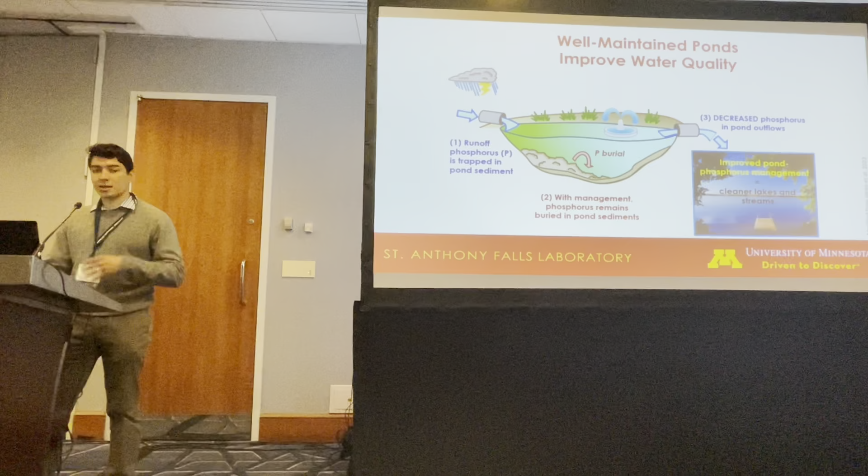So they're constructed as this kind of, I should paraphrase, they're not all constructed. Some of them are natural ponds and wetlands that have been converted into a receptacle for urban stormwater. Some of them have been constructed for that sole purpose. But basically they're designed to be sacrificial to some extent and capture all of these nutrients and pollutants in order to keep the lakes clean.

Now, they come in all different shapes, sizes, and colors, and how you manage them kind of depends on your priorities. Sometimes you have a pond that's treated as an amenity, it's in a very public place. We have to make sure that the water quality there also is kept to a certain threshold of quality. In other places, it's out of sight, out of mind, and you just let it go as long as downstream is protected.

But when we take a closer look at some of these ponds, and the green ones in particular, we see that there is quite a bit of phosphorus and nitrogen going on in that water. And if you know about how they're meant to be protecting against phosphorus in particular, we want phosphorus to settle to the bottom and stay put. So if there's a lot of phosphorus in the water column that's feeding the duckweed like Ben was talking about, that's when we start to get worried. We want to take a look and make sure, okay, does that just stay in the sediment in the pond, or does it get into the water and then flush downstream?

Unfortunately, green infrastructure, stormwater ponds, it's all connected to this big, larger urban watershed. Sometimes stormwater ponds drain 100 times their surface area. It's a very different loading ratio than what you worry about with most lakes. So there's a lot of dynamics that you need to take into consideration, like John was talking about with all of the organic matter and leaves that might be contributing to your ponds.

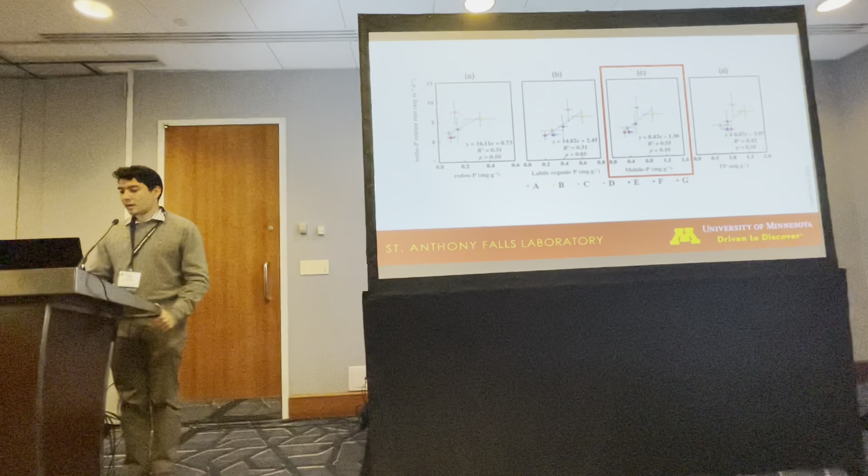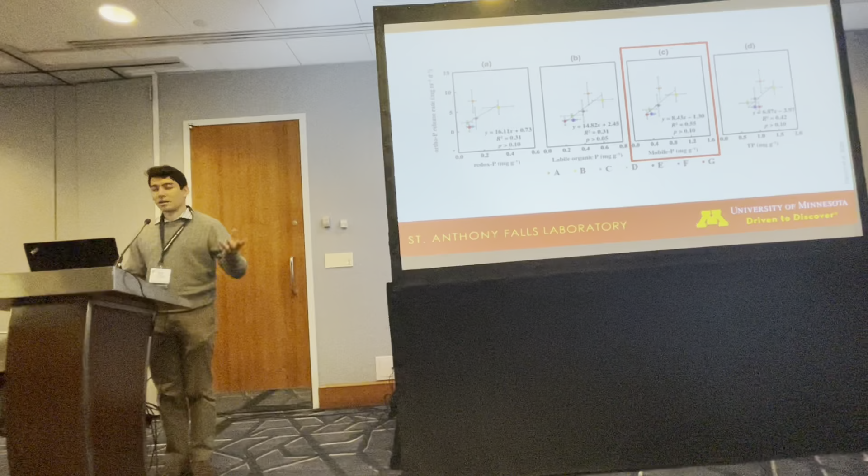This part I'll skip over pretty quickly, but why does this happen? If you want to go into detail, this is the paper we put out where we did some lab studies and tried to quantify the sediment phosphorus release rates in these ponds and the prevalence thereof. Basically, we linked it to mobile phosphorus, which is a combination of iron-bound phosphorus that's sensitive to how much oxygen is in there, and the metabolized organic matter from all this muck that accumulates in the ponds.

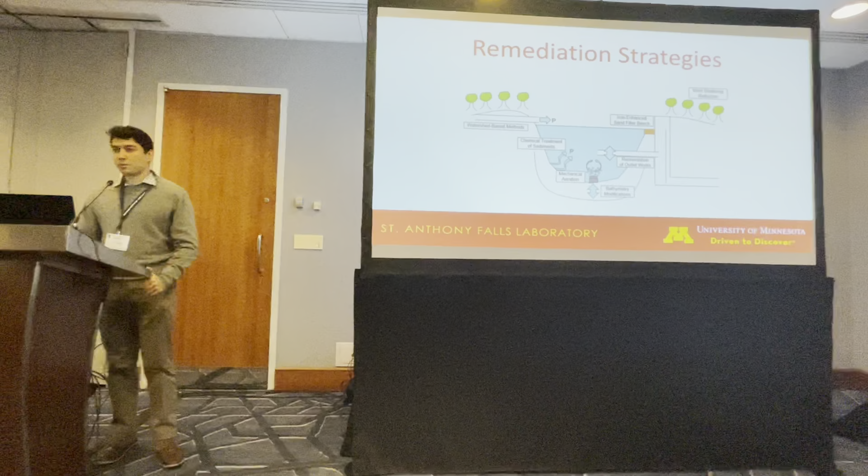So the real question is, what can we do? We have thousands of ponds, as the first two presenters mentioned, that were put in 40, 50 years ago sometimes, and it would be really expensive to replace them with anything, whether or not we get rid of them or we install some other way to protect our lakes. It would be really great if we could just continue using these ponds that we already have in an effective way. So that's what we're trying to understand. Is that possible, and how might it be possible?

So there's a number of remediation strategies. This isn't even a comprehensive list, but there's a number of lake management techniques basically that you can apply to stormwater ponds as well. And there isn't a good amount of data specifically looking at stormwater ponds to know, are these still effective in ponds, and more importantly, are they cost effective? Perhaps something that works in a large lake or reservoir is not going to be cost effective for a 1 acre pond that's in a remote area.

So what I'm going to focus on today in this talk is these 4 of the remediation strategies that we modeled, but I have a report where we looked at all of them. If you're interested, I'd be happy to send you a copy.

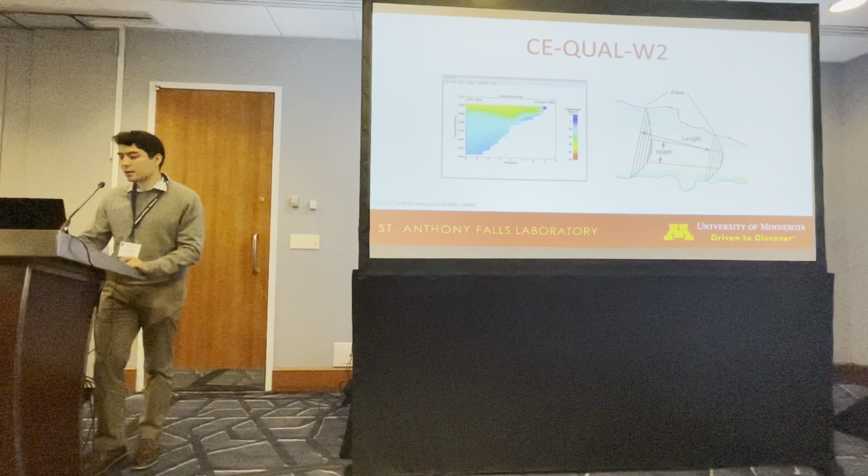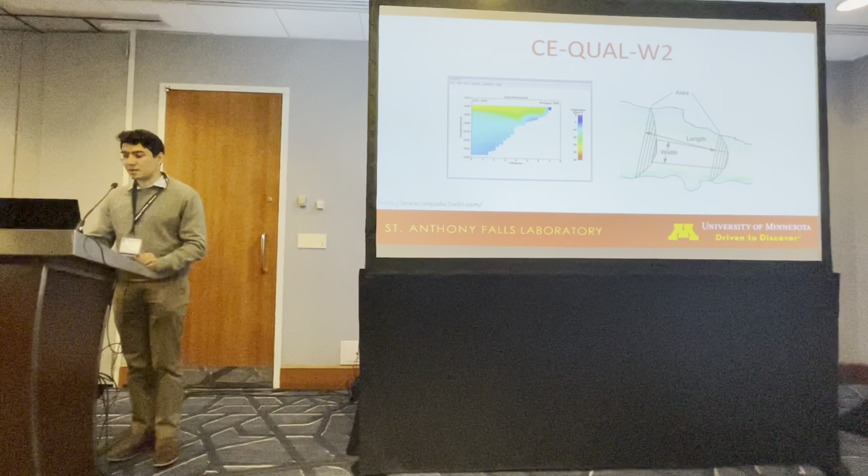So the way we went about this, we used the tried and tested water quality and hydraulic model CE-QUAL-W2. This was developed by the US Army Corps of Engineers quite a bit ago, which is why it's written in Fortran and is not very user-friendly. But it has been used in a lot of different applications. It's used to model lakes, estuaries, rivers, reservoirs, but to my knowledge, it hasn't really been used on stormwater ponds or something of quite that scale before. So we're definitely pushing the limit on what's possible, but it's a 2D computational model.

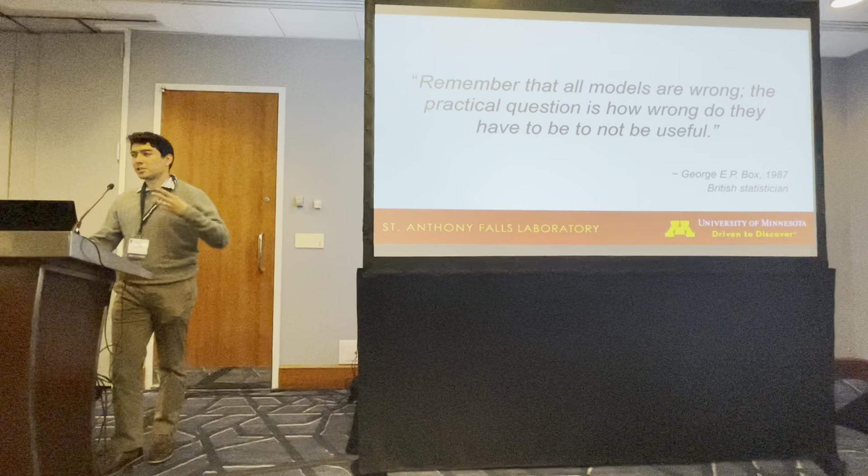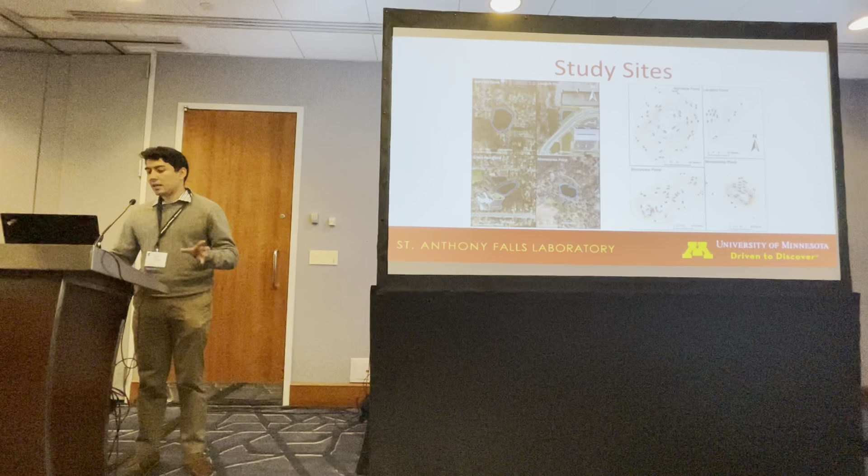So the way we went about this study is acknowledging that this is not going to be a 100% accurate representation of the ponds that we model. So instead of attempting to do what we feel might be impossible, we decided to say, okay, how can we make this a useful modeling exercise, where even if we're not representing real life, we're testing things in a way that we can get some useful information out of it.

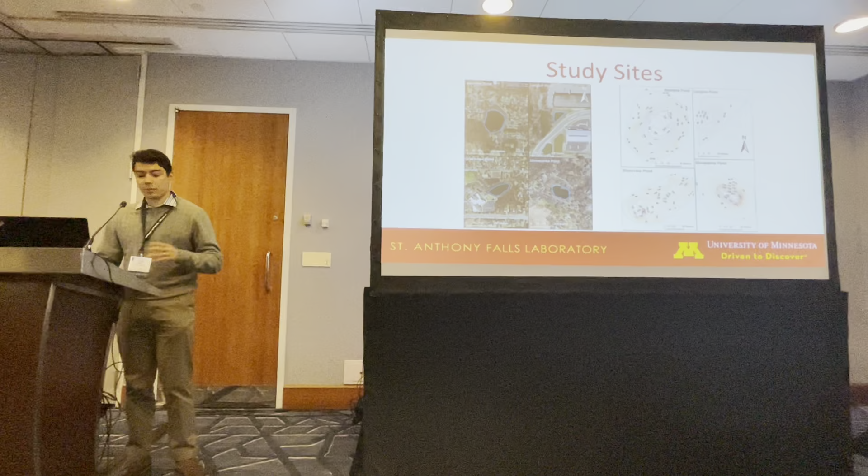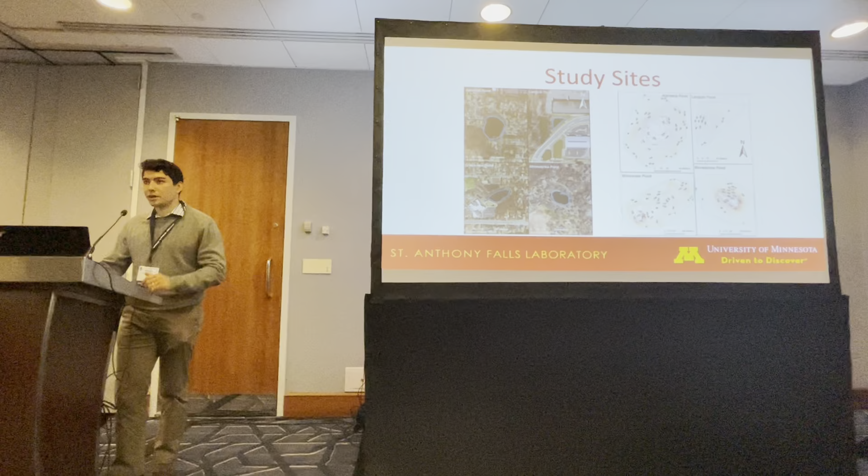So what we did, we picked 4 stormwater ponds. We tried to get a variety of ages, sizes, shapes, water quality. We collected a lot of data on them: bathymetry, water quality, the wind sheltering. You can see from these bathymetry maps, those are in centimeters. So we're looking at ranges of less than a meter to about 3 meters. These are very shallow systems.

That certainly had some consequences for how we go about modeling it. When you're looking at a large reservoir, you may have a vertical resolution of 10 meters, maybe 1 meter on the really fine side. We were looking at 15 centimeter partitions. This is some more information about those ponds if you're interested. I can always come back to this if you have questions.

But the other thing we had to figure out was, how do we model the presence of duckweed? This effort started about maybe 2 years ago, so we still didn't know quite as much as what Ben just presented. We knew the duckweed is there, it's really thick, and it has to be doing something. One thing we knew was going on is it's definitely going to be affecting how deep the light penetrates into the water column. So we collected measurements from our ponds, these profiles of temperature that Ben mentioned.

We've also been recording observations of what % of the pond surface area is covered in duckweed and wolffia and all these floating macrophytes. And we expressed that in the model. This was some calibration that went on to find these values. But basically, we wanted a light extinction coefficient for when the duckweed is not there, interpolated up to a value that was representative of when the duckweed was there. So that when we calibrated our model, we have the heat from the sun being dissipated appropriately throughout the water column.

The other thing we ran into was, since we had such fine vertical resolution of 15 centimeter increments, we started running into the issue of numerical diffusion.

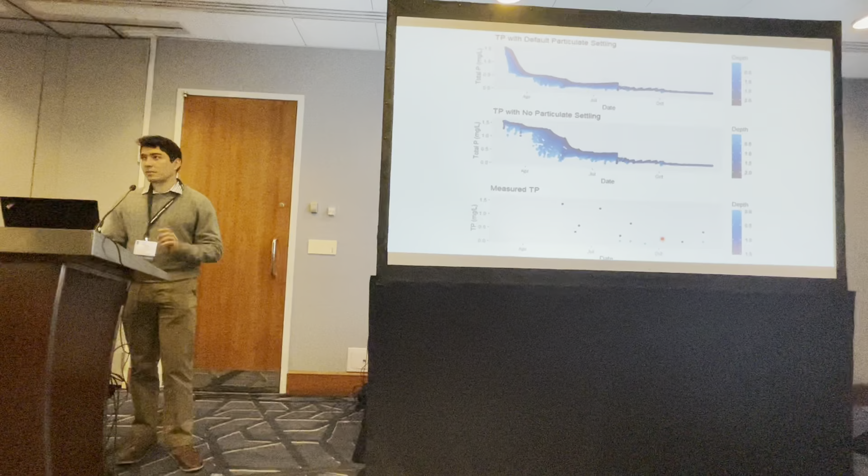So this computational model, since it's used for reservoirs and lakes and things of that nature, a large portion of the phosphorus is going to be in a particulate form tied to sediments and erosion. And so that settles very quickly, and that's an important feature for them to capture. But in our ponds, we have such a high fraction of the phosphorus in the organic matter, these fine particulates that really don't settle within the residence time that the water is in these ponds. So we basically had to turn off particulate settling in this model in order to get the phosphorus to linger in the water column about as long as we were seeing in the field.

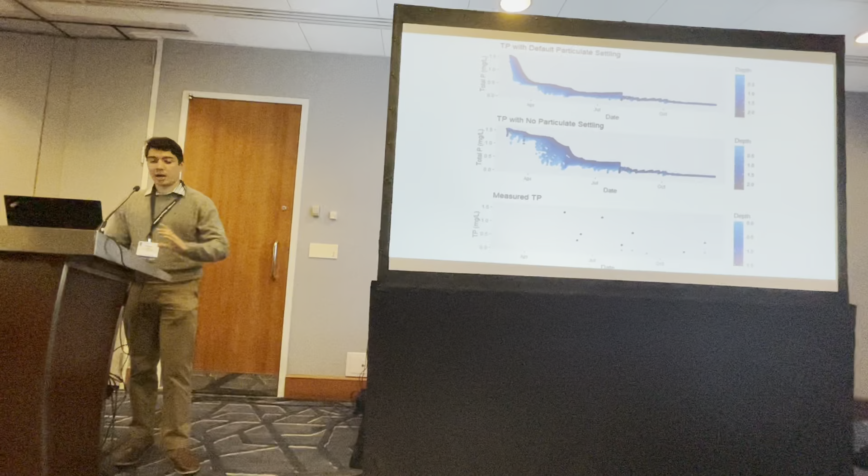Part of that could be what John was talking about, where the data that we're informing this model with, where we sample how much phosphorus is coming in, does not include all of the bulk organics and leaves. We just don't have the methods in place that John is currently developing. So because of that, we had dissolved phosphorus concentrations, and we needed to make the pond represent the phosphorus that is actually in the pond. So we needed to make some allowances for that.

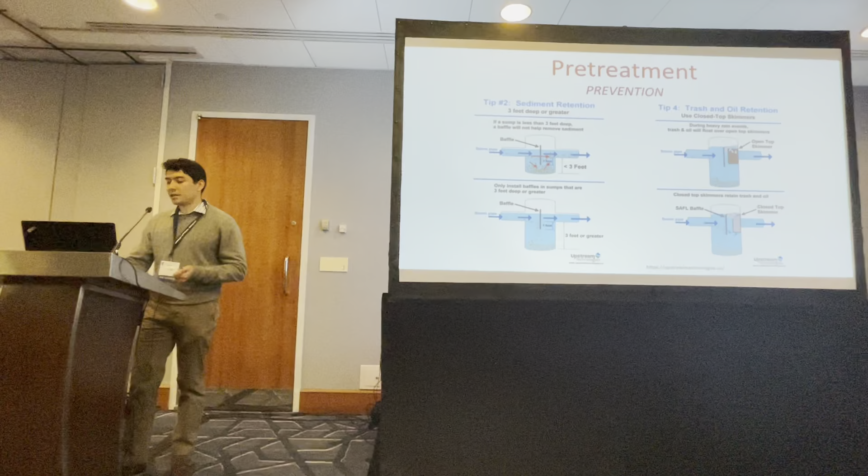So now getting into the treatment methods that we looked at. So of course, watershed-based practices, these are, I guess, preventative rather than reactive after the fact. Anything preventative is usually going to be cheaper than dealing with the problem after it. So if you have a pond that does not have this internal phosphorus loading problem, we thought these would be attractive options. So of course, managing the leaf litter and pollutants coming into the pond, or perhaps managing the stormwater altogether by reducing the volume, infiltrating it, capturing it.

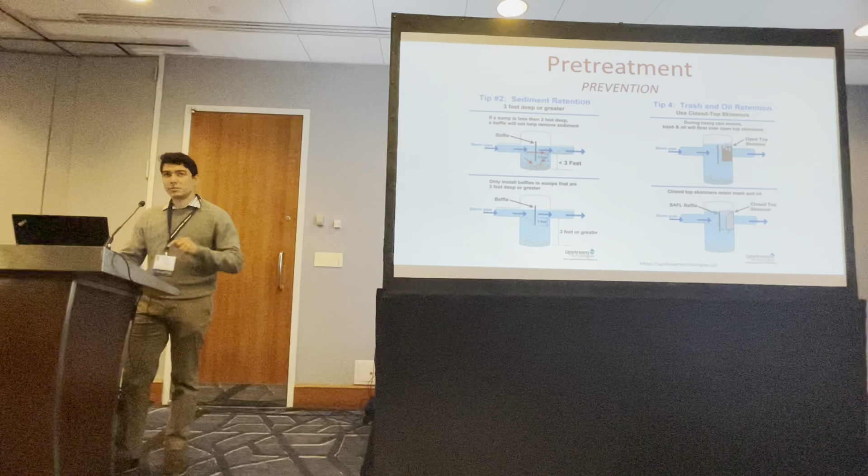Another way to do this would be installing some kind of structure upstream of a pond. There's usually a manhole. So if you install a baffle, you can capture a lot of the leaves, sediments, and trash. What we did for the model, since we're just feeding into it what phosphorus load is coming into the pond, we experimented with some different reductions in either the total volume of stormwater, so we kept the same concentrations that we have coming in over the season, but reduced that total volume, and then calculated based on literature how many rain gardens you would need to apply in your watershed to get that level of reduction, and what would that cost?

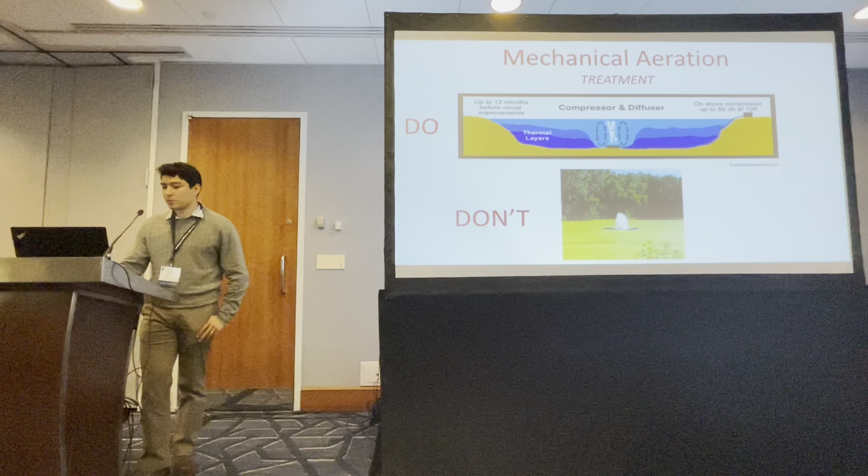Then we've got mechanical aeration. As Ben was mentioning, you have to make sure you do this well. So you don't want to just install something that's going to suspend all of the sediments and muck, or else you're going to be dealing with more of an issue than you had to begin with. Also, feel free to send me some information if you have seen this in your experience, but we haven't seen where fountains are really an appropriate solution for this. Typically they're just spinning around the water that's at the surface or a very narrow footprint.

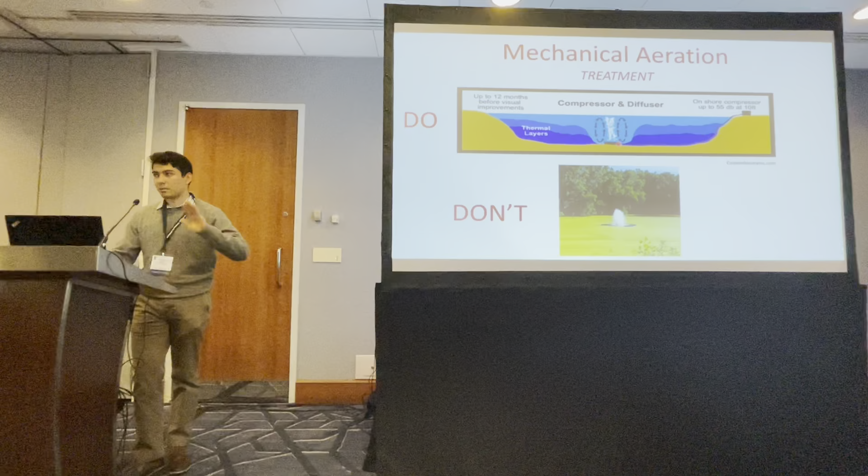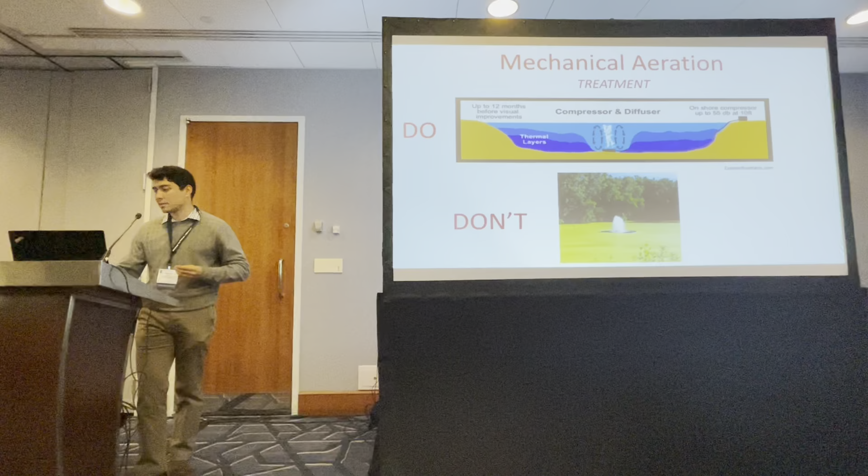And what we really need in order to overcome the stratification across a pond is a distributed network. So really you would have multiple of these bubble plumes that are mechanically mixing the pond. So it's not about injecting oxygen into the water. Those methods exist, but it's probably going to be too expensive for a pond. But this is just releasing air bubbles that mechanically turn over the water in a way that the wind should be doing, but as Ben demonstrated, isn't.

So in order to make these calculations, we relied on a lot of information from practitioners. Algae Control Canada in particular provided us estimates based on their work of what density of bubblers you actually need in these shallow ponds. So in a large reservoir that's deeper than it is wide, you can probably get away with 1 or 2 of these bubblers. But in a very flat and shallow stormwater pond, you need a lot of these points distributing it in order to mix it all, and they provided some costs associated with that.

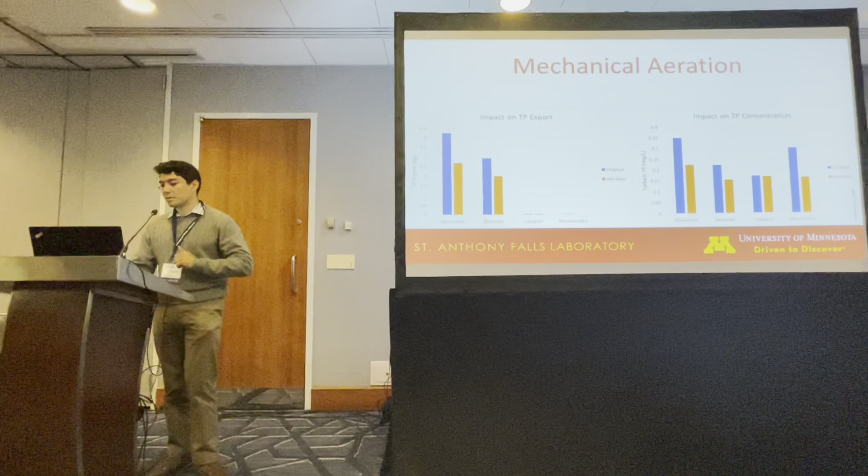So as we see with the mechanical aeration, we also get improvements, but again, we weren't able to test this mechanistically in this model. That's just a limitation of the model. So we had to measure the oxic condition sediment release rates of phosphorus in our ponds and then apply that into the model. So you see improvements in all of them except the Langton Pond, which doesn't release much to begin with. Then wind sheltering reduction that Ben mentioned.

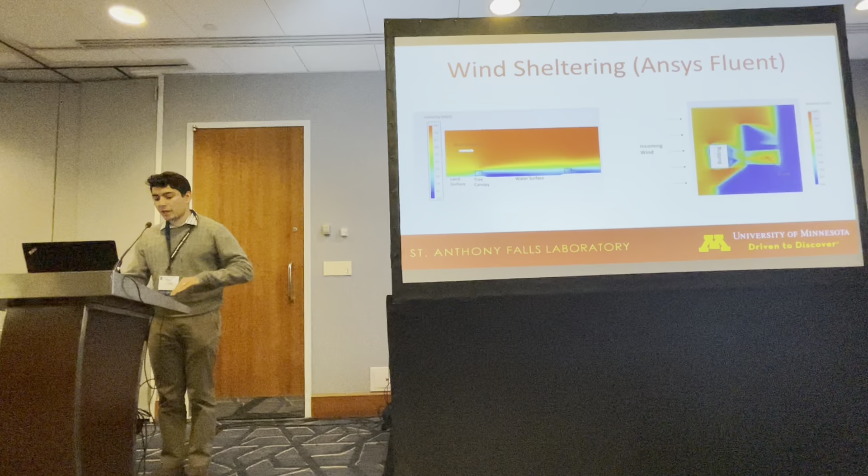I'm running out of time, so I'll go quickly, but basically the theory is that we don't want to cut down all of the trees around a pond, but a lot of times when they're built, you don't have trees to begin with, so perhaps you can just manage them proactively from the beginning and not run into the issue of sheltering. But if you do have a pond that's sheltered, maybe there's also a proactive management technique where you figure out some strategic places that you could remove trees to allow the wind to come in, and perhaps you can replace them with something that's still seen as an amenity, like prairie ecosystem, pollinator habitat. Just because we're losing trees doesn't mean we're losing ecosystem services.

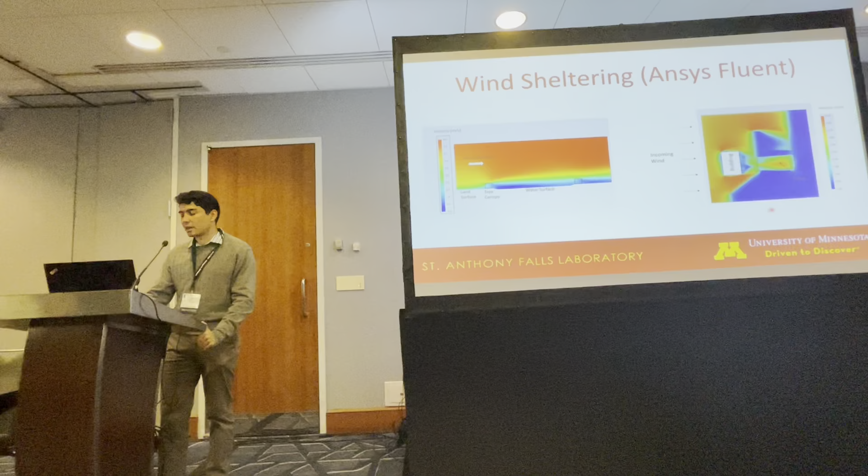So the way we went about testing this one, and this one, most of the credit goes to Dr. Bill Herb at the St. Anthony Falls lab, but he developed a 3D computational fluid dynamics model using a software called ANSYS Fluent, and tried to calculate how much sheltering is truly attributed to these trees and buildings and topography around the ponds, and how would that change as you remove the trees.

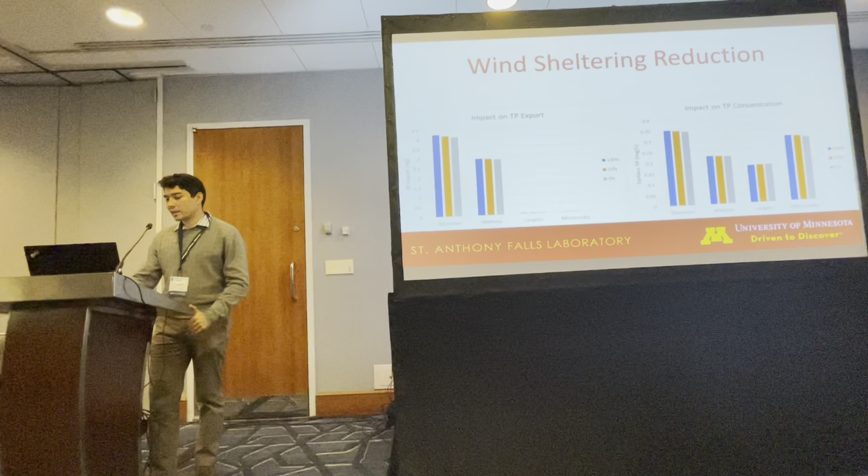So we basically calculated in each orientation that the wind could be blowing, how much sheltering are you getting, what you can reduce that to, and what would it cost to remove all these trees. Unfortunately, we can't calculate the cost of all the phone calls you're going to get if you just clear cut. So again, in our study, we're looking more at these strategic opportunities that are going to be cheaper and meet less resistance. But when we applied these new wind inputs to the model after having removed trees, we were surprised to see that we didn't really get that much of an improvement.

And perhaps there's something with the model I don't quite understand, but from what we could figure out, it seems like it's just not as sensitive to it as we would have thought. So it's hard to say whether that's an artifact of the model or it's something that's truly going on in these ponds.

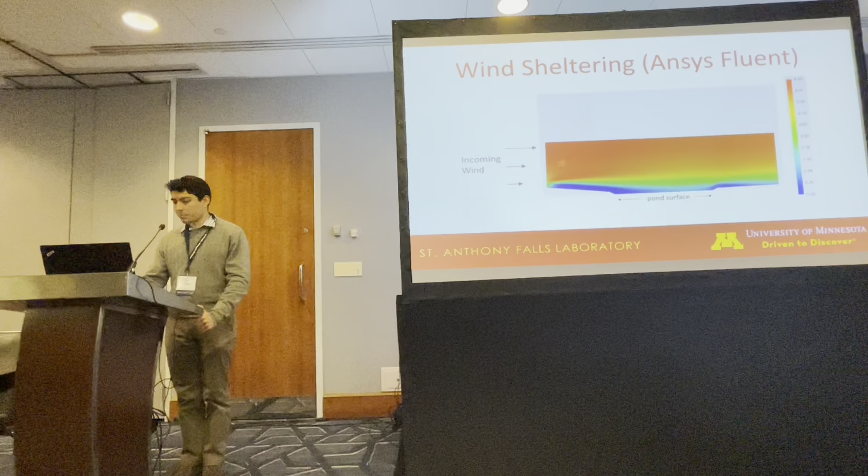So, running out of time, so anyway, we compared all of those based on effectiveness as well as cost to try to recommend for different kinds of ponds what would be the better alternative. There's not one solution that works for everything. You definitely have to know something about your sites, but happy to take any questions if there's time.